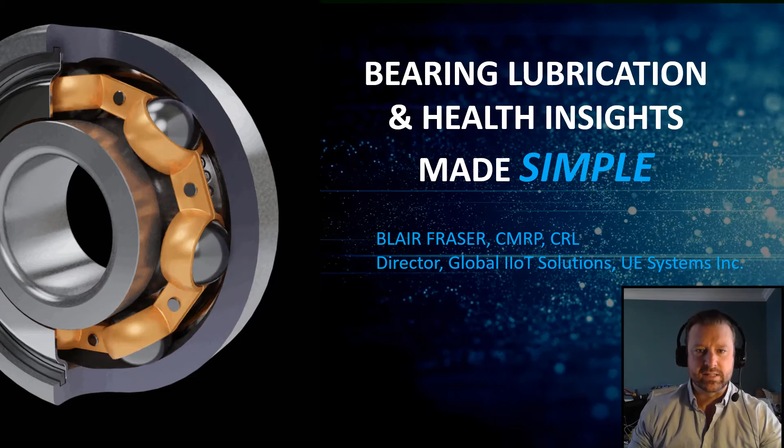Before we dive into the content, I'll give you a brief overview of myself. You'll be listening to me the next 30 or 40 minutes. My name is Blair Fraser. I am a CMRP and CRL. I've spent the last 20 years in maintenance and reliability, with about the last 12 years of that focused on the technology side. Before that, I was an end user, responsible for equipment in various industries. Over my career, I co-founded an artificial intelligence company called Cortic.ai. I'm a co-host of a podcast, hopefully you've heard of, called Maintenance Disrupted, and I'm also an adjunct professor at the University of Wisconsin, the Connected System Institute.

As I look out in the ecosystem of IoT, specifically from a bearing monitoring point of view, I used to be able to count on at least both of my hands the number of vibration sensor companies out there. Now, with the advent of MEMS sensors and easier to connect data, that number has risen to hundreds, if not thousands. Really, as we look at this, there seems to be a solution for every single problem we have out there. But really the question is, are we even focusing on the right problems to begin with?

When we think about IIoT, the Industrial Internet of Things, we think back, at least I might date myself here, to the early Star Trek days, when information was coming out to us. We have this idea of having a command center with all this information coming in. But the reality is, where we're at in our data journey, we have enough data, we're generating enough data. What we need more of is insights.

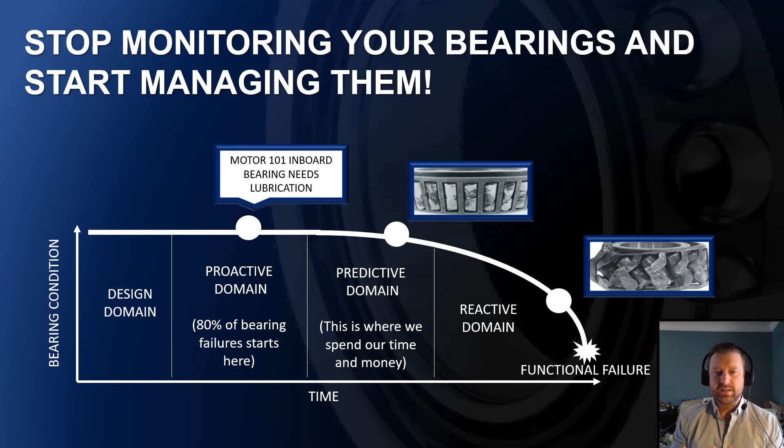Now, when it comes to identifying failures on that P to F curve, ultrasound owns the apex of that P to F curve for bearings. One of these is our P to F curve that we promote on our website, and the others is by other industry consultants and things like that. I don't think it goes into very long debate about ultrasound and its value proposition.

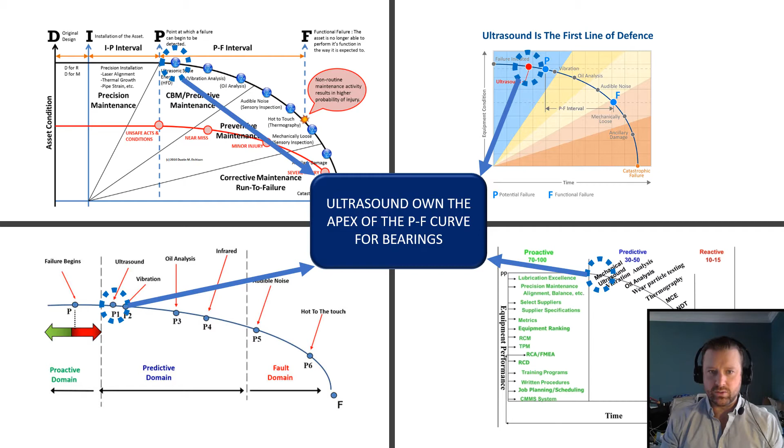Now, it's often seen as that first sign of an issue once a bearing starts to have those conditions. But this goes back to a study a long time ago, and if you think about it, what we're doing with ultrasound is we're listening, we're measuring for friction. So what many studies have shown, and these studies often get reproduced year over year in academia, is that ultrasound will be able to detect a change, or what they call an incipient or initial stage of bearing failure, before there's a change in vibration or temperature.

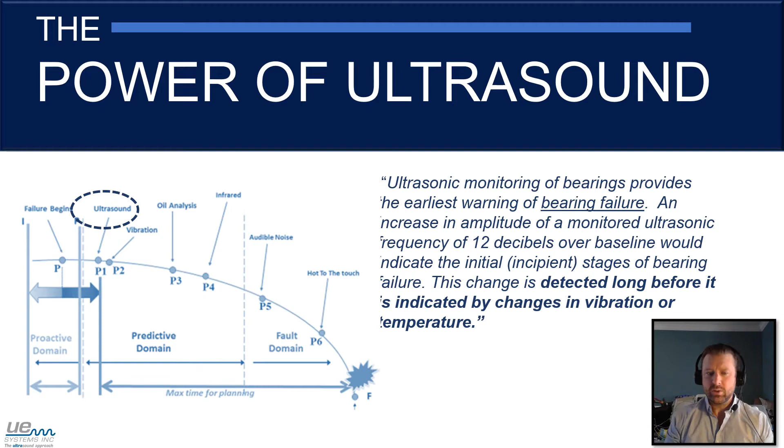So it does really give us that advanced warning notice, but in that signal it's doing, measuring that friction, we can also use it to really own that proactive domain. So when we look at ultrasound, what is it doing? I just read a study yesterday from Plant Services magazine that indicates ultrasound is actually growing faster than vibration in terms of a condition monitoring technology. More people in their study plan on implementing ultrasound than vibration, which I think obviously from a UE Systems perspective speaks to the power and simplicity of ultrasound.

So what we're doing when we're putting an ultrasound sensor on - now all ultrasound sensors are not created equal, and there is a difference between acoustics and a microphone and an ultrasound sensor. We're starting to see with the advent of IoT and specifically the low cost of MEMS sensors saying, oh, I have ultrasound in this, or I have acoustics in this. And you do, for a certain point, but do you have the sensitivity and the frequency range that we need to look at from this friction point of view?

So what we're doing is when we mount a sensor - I'll quickly hold it up. This is one of our ultrasound sensors, called our UltraTrak 750 sensor, that gets mounted to a bearing. And what it's simply doing is listening to that bearing, listening for the signs of friction and impacting.

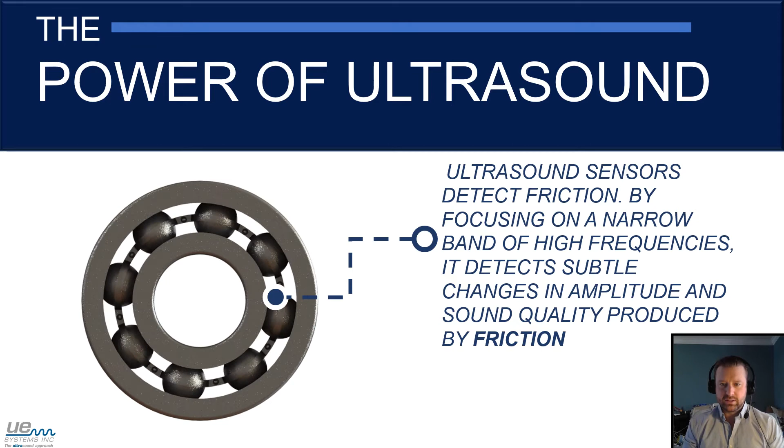And what's interesting is when we think about this, it goes back to Nolan and Heap again with that P to F curve - what they fundamentally taught us is that doing maintenance, or making decisions based on the condition of an asset, is a lot better than doing it on time. But yet for our bearings, and specifically lubrication, we're still doing it on time and not the condition. So without a doubt, the condition of that bearing is proportional, or directly proportional, to the friction in that bearing.

So the value of vibration - we are a big believer in vibration. We are UE Systems, we're a big believer of having a toolkit of available condition monitoring and strategies, and that is what is going to set the difference for you and your assets.

The reason I wanted to bring this up was, when you think about vibration, essentially what we're doing in the simplest terms is we're measuring displacement, we're measuring movement. So something has to move, even very subtly, before vibration is going to pick it up. So what we're doing with friction and ultrasound is we're picking up those subtle changes in impacting and friction versus movement. That's why we're able to pick up a lot of these failures before vibration.

Because we don't have to wait for this thing to physically start to move. Whereas with vibration, you would typically put a triax sensor in to measure all three axes, because you're trying to measure movement in different directions. Where ultrasound is very directional - if you think about this, if you were to listen to a bearing just with your ears, of course this is in the audible range of a human, you would fine tune it. You would say, okay, sound's coming from that way.

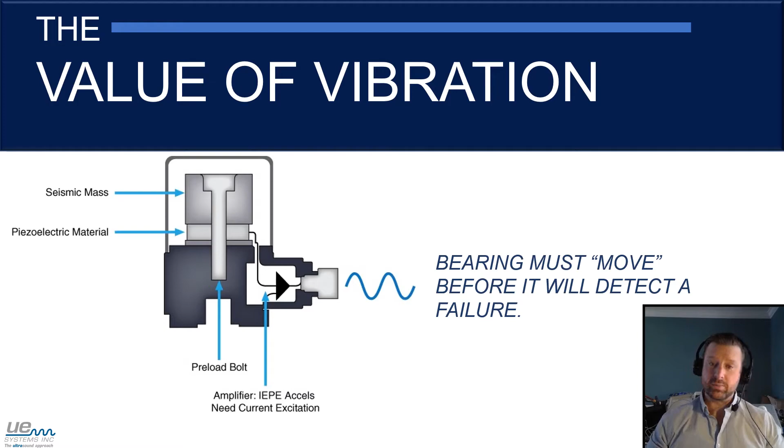And start to hone in from that point of view. So sound obviously comes out. What it allows us to do with ultrasound is mount in locations and areas where we're not concerned about different axes and things like that.

So let me give you this hypothetical question. Do you agree, even without identifying the exact cause of a fault, there is great value in simply identifying that maintenance is required, therefore avoiding catastrophic failure and the potential for secondary damage, injury to personnel, and excessive downtime? Is there value in knowing that something's wrong, even if you don't know the exact fault? The reason I'm saying this is because I firmly believe that, from a vibration point of view, is identifying the root cause or the fault.

Is it an inner race defect? Is it an outer race defect? With technologies like modal and ODS and those type of things, you can get down into the weeds. But my question to you is, does your action based on that data change whether it's an inner race defect or an outer race defect? Most of the customers we talk to say no. We will use that data in a root cause analysis to try to engineer out or eliminate the defects that are causing this, which I think is fantastic. But in terms of the direct action you're going to take, it's no—I'm going to replace that bearing.

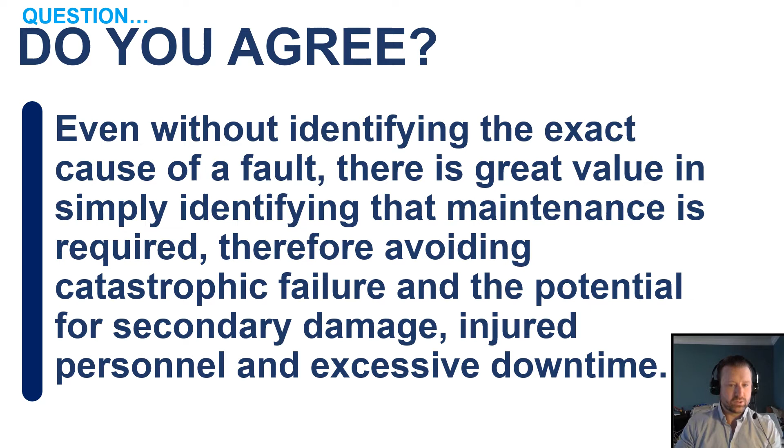What we found is, as we see the advent of IoT start to really push us away from route-based data collection—typically people walk around with a handheld analyzer and take route-based data on a monthly basis—our studies and industry studies show that on average, 80 to 90% of the data we're collecting is on equipment, on machines, on bearings that have no impending issue. They're healthy, there's no action required. From a reliability, asset utilization, uptime point of view, that's fantastic for you. But from a business perspective, you're spending a lot of time and resources going around to pieces of equipment that don't need their data collected.

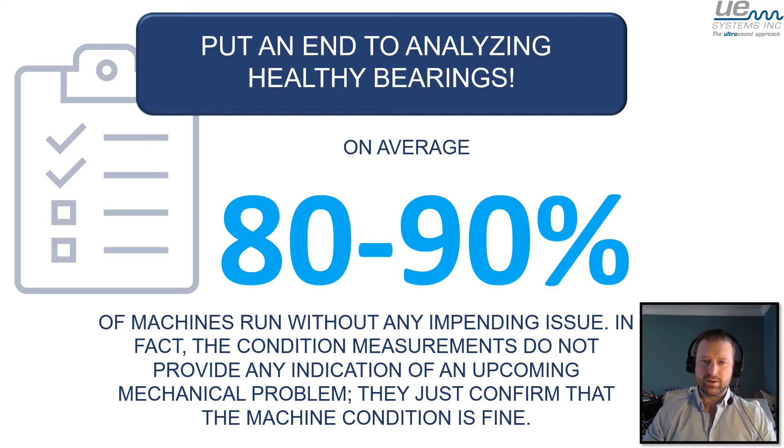Now, there's always an advantage of having a human out there. As much as I am a fan of technology, and I do believe technology has its place, we're not at the point now where we're ever going to replace a human putting physical senses out to things. There's certain things people may be able to pick up by doing routes—is it leaking, is it dirty, things like that. But on average, 80 to 90% of the time, we're collecting data on machines that are healthy. That's really where the IoT part is coming in and simplifying how we're managing our bearings.

I'll get into this a little bit later, but study after study shows—this is a study by SKF, but it's been reproduced by industry analysis and other bearing manufacturers—that the smoking gun of premature bearing failure is lubrication related issues. There's no doubt about it. This study showed over 80%. I've read other studies that show 60%, 70%. Regardless, whether that number is 80% or 60%, it's still the obvious cause that we can start to address in that proactive domain.

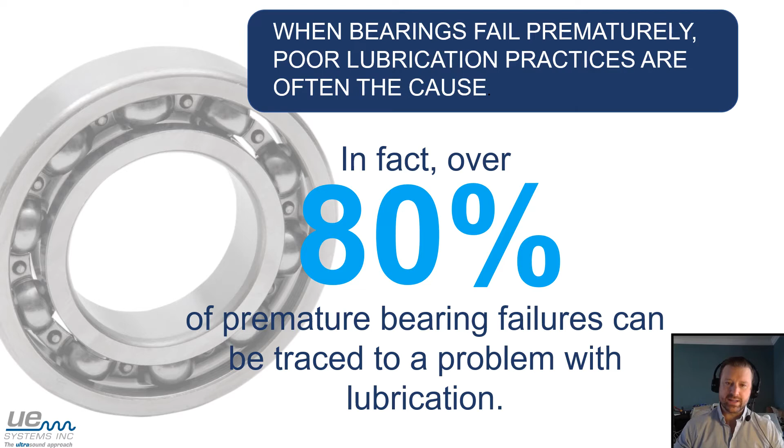So I'm going to challenge the mindset of thinking here a little bit. I want you to imagine that you could walk up to any bearing in your facility and ask it just one question—just one question. You can't ask for more questions. But imagine you could walk up to a bearing and ask it just one question. What would you ask it? I'm going to let that sit and percolate for a minute.

So I get typical answers: when are you going to fail? Or what are you going to do for me today? Or even, how are you feeling? Those are some good questions to ask. But let me flip it on its head, because what you probably just answered in your head or in the chat is likely, and no offense to anybody—this is just human nature—a very selfish question. We put those bearings in place, we want them to spin with as little friction as possible to do what it needs to do. But if we flip that question on its head, imagine that bearing could ask you a question. What do you think it would ask you?

Isn't that interesting? We're flipping that whole scenario. What it's going to ask you is a better question than what we would ask it. It's probably going to ask, hey, when are you going to grease me? I need some grease soon. Or, you're starting to operate me outside of my design parameters. We got to flip the question on its head. That bearing is talking to us, trying to ask us questions or tell us information. We just need to be able to listen to it.

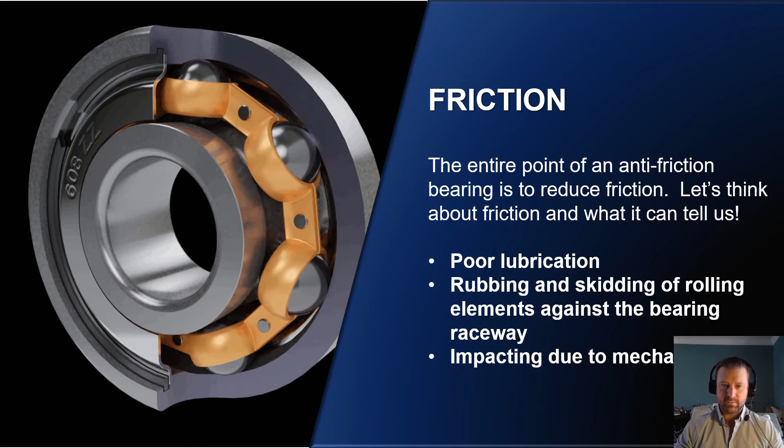By measuring just one variable, the friction in that bearing, we can get some very simple but very useful insights. So let's go back to that study where they said over 80% of premature failures can be traced back to a problem with lubrication. If anyone wants to reach out to me, I'm happy to send you this study, it's in the public domain. What it talks about is they break that 80% down into 4 categories.

Insufficient lubricant quantity - often when we think about that 80% of premature bearing failure, we ask, are we lubricating enough? Are we giving it enough? But that is actually the smallest part of that 80%. We start getting into a long time without renewing, unsuitable lubrication, so mixing greases, putting the wrong grease type or oil type, things like that, and contamination, lubricant contamination. We know what dirt, grime, and water does to our lubricant - it essentially breaks it down.

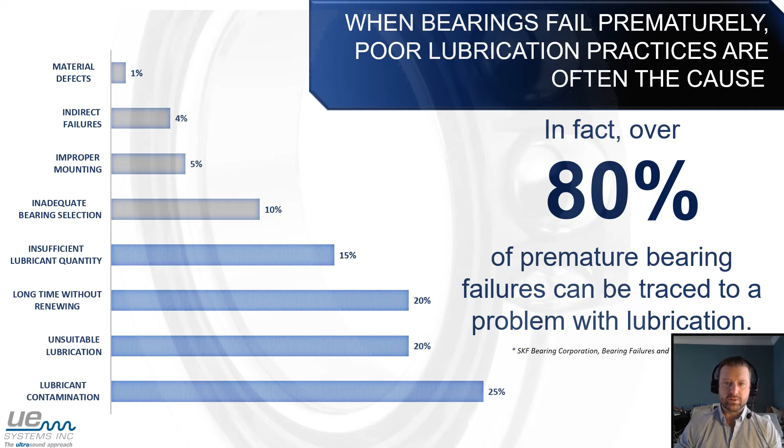So we need to look, when we're starting to look at that proactive domain, at all 4 of these categories that are causing that premature bearing failure, to truly make it simple and easy to monitor the health of our bearings. Now, what's happened with lubrication as we focus on that proactive domain is, we've gone to great lengths to make sure from a mathematical or theoretical point that we start to lubricate as accurately as possible.

Now, this happens to be a Noria calculation. There's one by SKF, and I think they're fantastic calculations to get you into the ballpark. The challenge is a lot of our factory floors, a lot of our machines are being asked to do things differently on a day-to-day basis. I'll give you an example here.

If you look at this calculation, there's a parameter called N equals speed. How many of us have assets that rotate at different speeds? More and more we're seeing single speed motors getting transformed or retrofitted into variable speed drives. We're seeing control valves go away and variable speed drives come in. So speed has a huge impact, and that obviously makes sense - the faster it spins, the more rotations, the more lube it's going to need eventually. And also, all these correction factors.

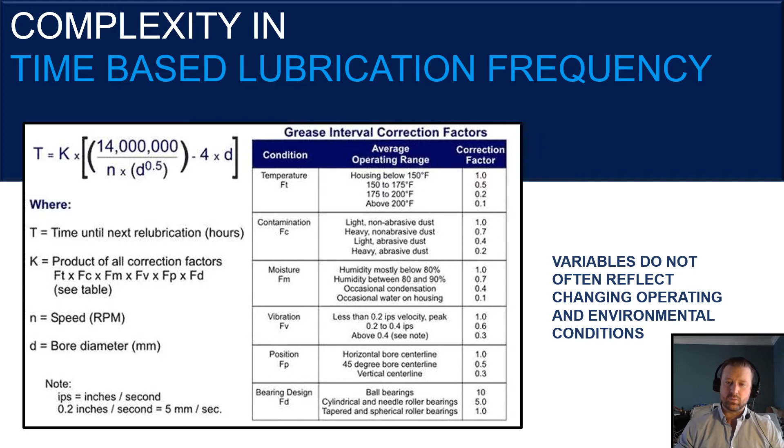Give me an example - here's temperature. The first category is housing below 150, and the next one is 150 to 175. What if that bearing housing is 151? Do I use a correction factor of 1 or 0.5? In fact, I should probably use like 0.93 or something like that. The whole point I'm trying to make is that our variables used to make these calculations often don't reflect what's actually happening in our operational environment.

So what we do, and this is the main driver of the simplicity of our systems like the OnTrack, is using ultrasound to monitor that very telling condition of friction in our bearing. The reason I reference this is often people look at this and say, this is too good to be true, it can't be that simple. We say it's so sophisticated, it's simple. What's happening in these sensors and how it's measuring that ultrasound, trust me, it is not simple. But how the information gets to you is very simple.

So what we do - this is an ISO standard, ISO 29821 - talks about once you set a baseline. Everything is dependent on that baseline, and I can go into a lot of information on how you set a baseline, particularly how do you set a baseline on a bearing that's already been lubricated, already operating. Not too often do we get a brand new, healthy, well-lubricated bearing come into our facility.

So what we see is we see an 8 decibel increase in that friction. To us, the decibel reading is a friction reading. So if we see an 8 decibel increase over baseline, it's an indication it requires lubrication.

What we're doing here, and it's important to note, is that at 8 decibels it's not screaming, there's not going to be any difference in temperature or vibration and movement. It's that thin layer of film on the rolling elements starting to degrade. So it doesn't mean that at 8 decibels you have to rush out that minute and lubricate that bearing.

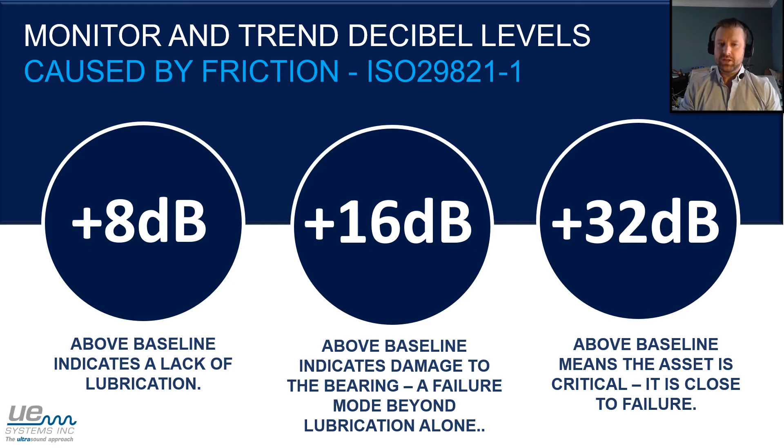Now we see a 32 decibel increase over that baseline, it's a critical failure. So this is when you start to need to plan to have some immediate action in the near future.

So this is the easiest way I can start to describe, and really the title of this is to simplify. How do we make bearing lubrication and health insights simple? This is one of the ways we do it in our UE Insights with our on-track product. Let me walk you through this.

So imagine you have hundreds, if not thousands, of bearings in your facility, and you want to know the condition of them all. What you don't want to do is look at squiggly lines where you have to stand on your left foot, bite your tongue to the right, and go like this, and then think, I think I see this.

This is very intuitive to use. In fact, what we designed this for is even people that don't necessarily have a technical background. You don't have to be an ultrasound expert, you don't have to be a bearing expert. It's very easy to see this.

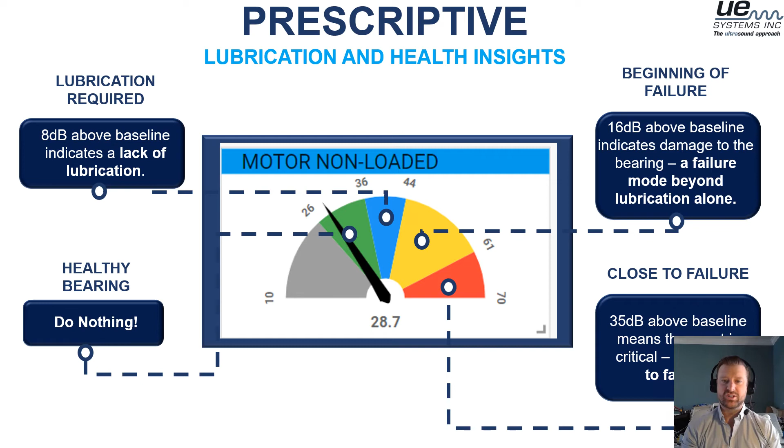And again, I said this before, I don't care what the failure mode is, most every failure mode in a bearing leads back to friction. So if that friction is starting to increase and climb on a daily basis, you know the trajectory of how quickly that bearing is starting to fail. So how simple is it to see bearing health insights from friction?

This is actually the trend that I took a few days ago from this bearing. And what you're seeing here is, first of all, there are four dashed lines. Now, the green one at the bottom is hard to see. That's actually the baseline friction, which is sitting at, I believe, 9 or 10 decibels. And you can see the solid blue line floating above it. That's the real-time friction taken every minute from that bearing for 24 hours. This is a healthy friction trend in that bearing.

That blue dash line above it, which is 8 decibels above that, is the lubrication friction level, the need for lubrication. If that blue trend line was to go above that blue dash line, we need to start lubricating that bearing. Now that yellow is the warning and the red is the critical. This is really how simple it is to monitor the health of your bearings. We're trending a friction time series value. This is ideally what we'd see.

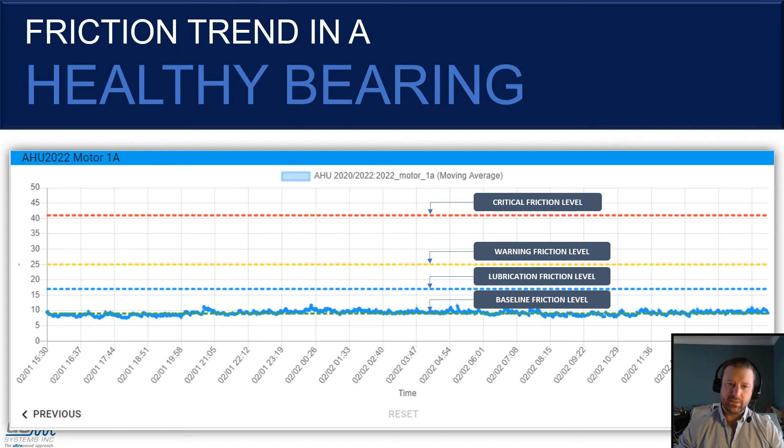Now, the reality is, a lot of our bearings, we don't see this right away. So when we take a closer analysis, you'll find that friction is trending near that baseline, so it's not waving around.

Now, this is probably one of the most common questions we get asked: I have a variable speed drive. Won't my friction change?

Okay, so a lot of research has been done for this. I welcome you to read the study, we have some studies here I can send you where friction, or ultrasound, was trended through varying speed drives. And what we find, and this is fantastic about friction, regardless of the speed, friction should remain constant. There's a caveat there: in a healthy, well lubricated bearing, regardless of speed, the friction should remain constant.

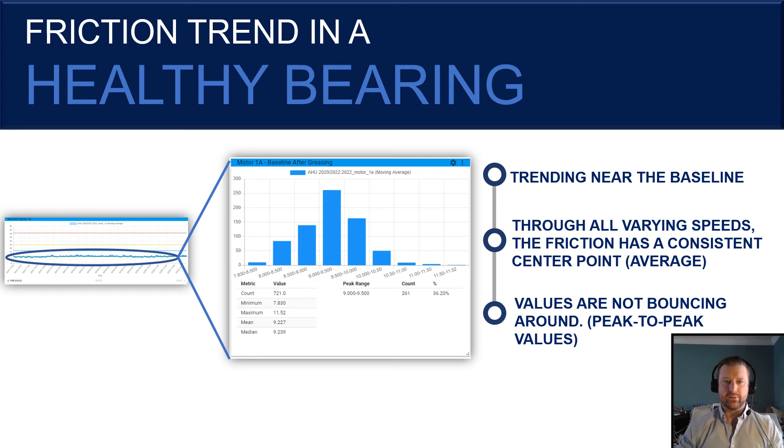Now we do see maybe a 2 or 3 decibel change, which may make us have to change our alarm limits a little bit from the lowest speed possible to the highest speed. Even on a well lubricated bearing, we might see a slight increase in that friction. Now, as we're talking about a healthy bearing, when we do not have a healthy bearing, that completely changes. We see a huge, obvious impact on that friction. And what we see too is we don't see the peak to peak values change much. So we can have an average value hovering around that baseline, but we don't see a lot of jumping up and down, which I'll show you exactly what that looks like.

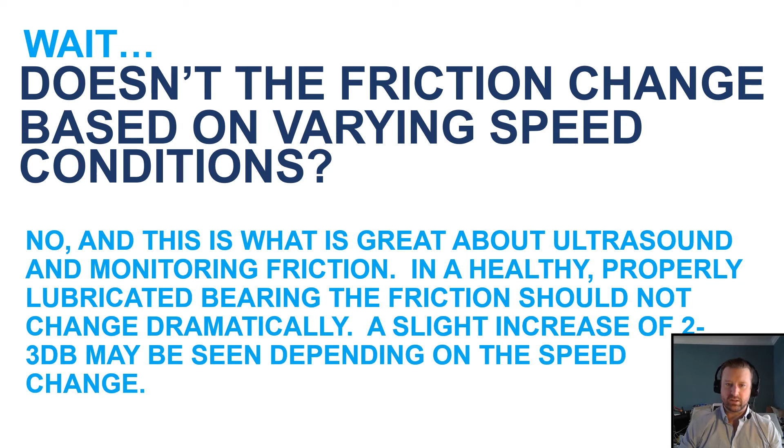So wait, doesn't friction change based on varying speed conditions? As I talked about, no. I'm going to show you what this looks like with some trends here. We do see a slight increase. Now, if it's an unhealthy bearing, we see a big increase, but that change in decibels should not change too much throughout varying speeds. Remember that.

So what does the trend look like in an under lubricated bearing? This was a case study. We put this sensor on for about an hour to gather some data. Within an hour, I can start to see relative condition and needs of those bearings. Our initial friction was at 14 decibels. We had a peak to peak, so the max reading and the lowest reading within that time window, close to 7 decibels, which is a bit high. That's a little bit concerning to me.

And what that tells me, if I was to zoom into this, and I do have one I'll zoom in here, is if you were to look at the actual trend, you can see it bouncing around. Now imagine you're playing an audio off that bouncing, you would literally hear static. And what that's an indication to us is, that bearing requires lubrication.

Now what we were able to do is, this is actually our SmartLube system, which uses these. You might have seen these or used them in your facility. They're referred to as automatic or single point lubricators. What we've done is we designed our own called the M-UE lubricator, which is designed specifically to work with our SmartLube system.

So in this use case, we were able to monitor the friction, and through my cell phone, in fact I used my computer, I was able to apply and tell this thing remotely from hundreds of miles away to actually put a little bit of grease into that bearing. So I put 15 cc's of grease into that bearing. What was actually happening was I had to fill some remote lubrication lines and things like that, but I did it from the comfort of my home.

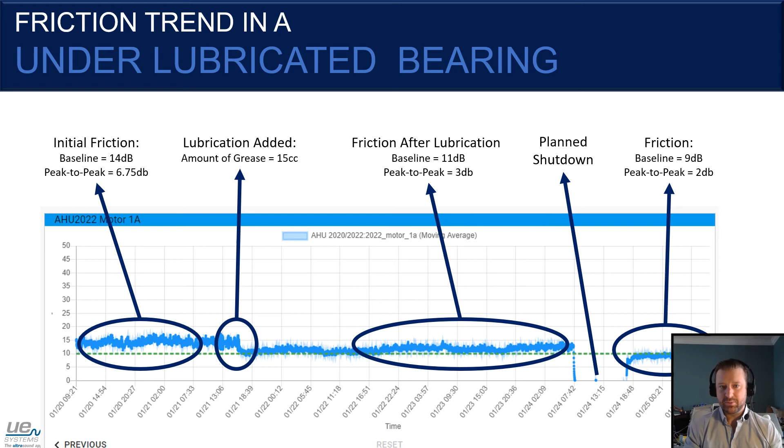And I should have noted at the start of this, this is on an HVAC unit, a varying speed drive. During this time period of 24 hours, this went through every speed possible of that HVAC, and you'll notice there is not a large change in the friction or decibel readings. This is how simple really it is to lubricate and to monitor the health of your bearings.

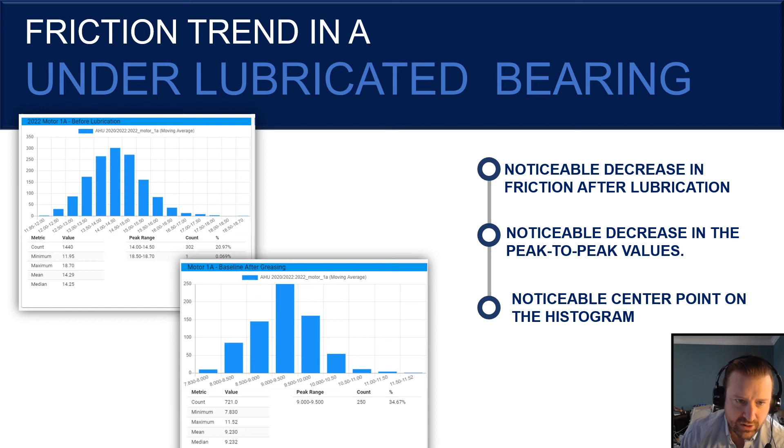When we look at an under-lubricated bearing, the histogram on the back end shows a nice bell curve. There's one center point, and regardless of speed, we want a nice center point. Not only did we see a decrease in friction, but also a decrease in peak-to-peak value. Our center point went from 14 down to 9 decibels. Our minimum was 7.8 and maximum 11.5, where on the other side, our minimum was 11.95 and maximum 18.7. Quite a big difference in those peak-to-peak values.

So the friction trend in an under-lubricated bearing shows a decrease in friction the moment grease hits that bearing. One of the challenges we set out to disrupt is bearing lubrication, being able to lubricate very precisely using single point lubricators such as the MUE lubricator. But we need confidence that grease is actually hitting the bearing. A lot of the challenge with these single point lubricators is they're based on time, which doesn't impact the condition of the bearing. If the grease cartridge runs empty or the battery dies, there are many reasons why grease cannot or doesn't reach the bearing.

We know grease is hitting the bearing because, whether good or bad, we see a change in friction. In this case, we added 4 cc's, and you can see that change in friction after adding it. We added another 3 cc's, and we kept seeing that friction level drop. We also saw those peak-to-peak values start to drop. So it becomes very obvious once you install a friction sensor onto a bearing.

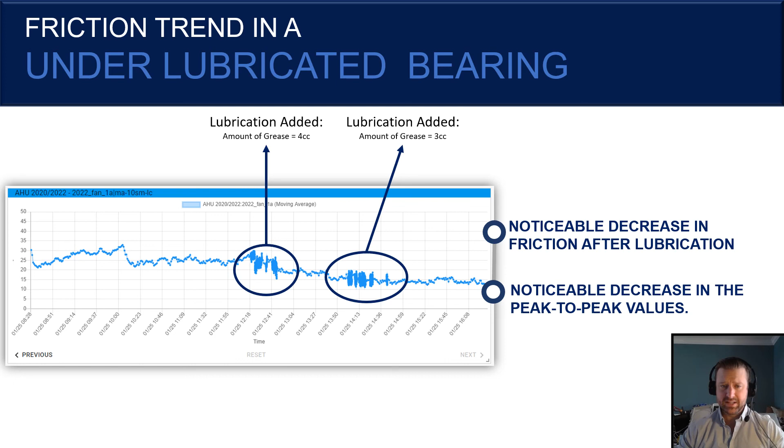Generally, what is its health, and is it asking for something? Remember that question, if that bearing could ask you something? It is asking you, it's just speaking the language of lubrication.

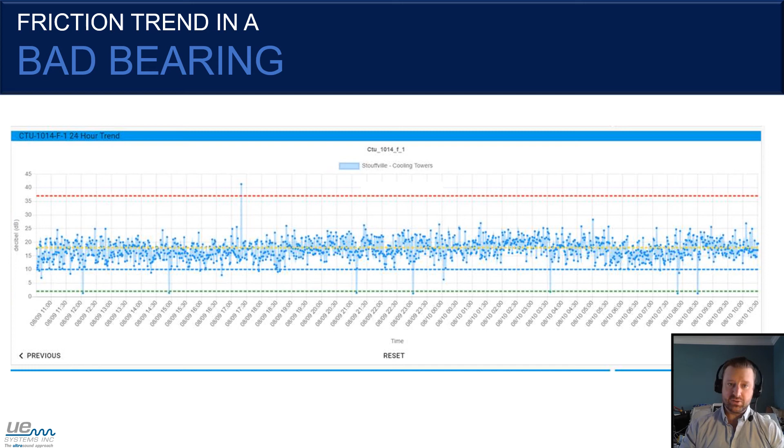Now the friction isn't increasing, but the peak-to-peak values are, which is an indication it needs lubrication. If we do not lubricate it, we'll see that friction start to rise over time. If we look at the histograms, we'll notice friction increased day after day after day. I think it was 4 times in 4 days how much that friction increased. We started at a peak range or mean of 4, and ended up with almost 14 decibels - a huge increase in friction. This is a bad bearing. Becomes very, very obvious. I don't know if it's an inner race defect or an outer race defect, but I do know it is a bad bearing.

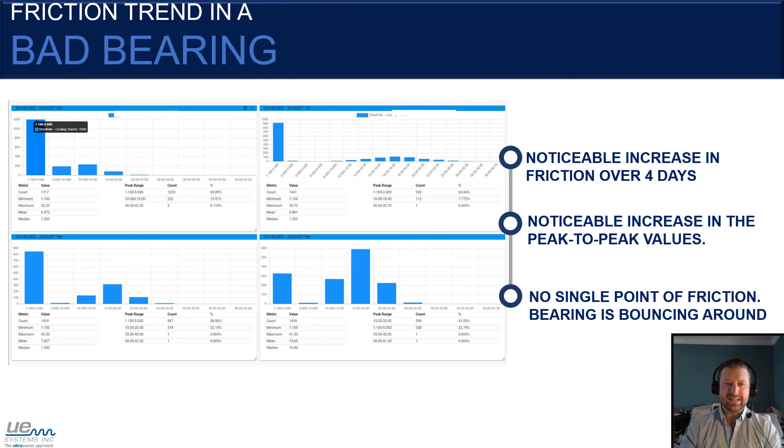So as I mentioned, everything is really about setting that baseline. A lot of thought has to go into setting that baseline. We recommend 3 different ways of setting the baseline: setting while lubricating, historical, and comparison.

So with the addition of the SmartLub and being able to do this remotely, this really changes the game. When you install a new system, you have these lubricators. You can grease at any point in time, or it'll automatically go and grease for you by measuring friction and

restoring that friction. So we would always recommend setting while lubricating. What you would do is you would put a small amount of grease. These UE lubricators can output varying sizes or varying amounts of grease coming out of it, as low as 0.33, so a third of a cc.

That is like half a teaspoon. It's a rounding error on typical grease guns, right? So when we say apply a small amount, we literally mean apply a small amount. You apply a small amount, and 3 things are going to happen.

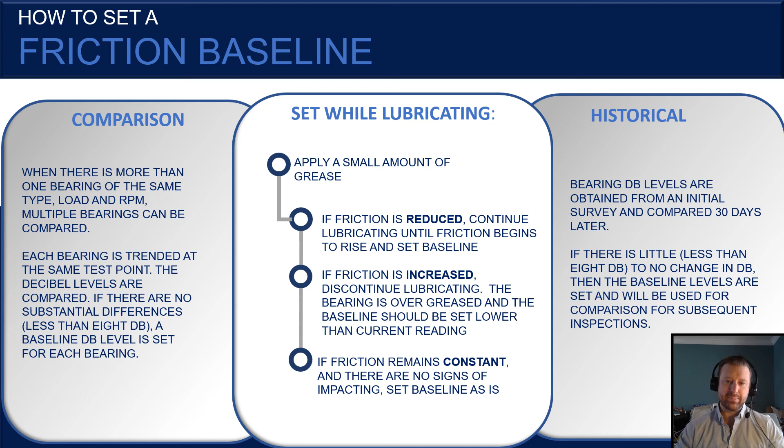So bearing lubrication and health monitoring made easy with friction. So the moment you install an ultrasound sensor, measuring that friction, measuring that impact, look for a consistent average trend value. Look for a nice steady line across all operating conditions.

Look out for those peaks and valleys, that noise that we see. While the friction might be there, this is a good indication that it's bouncing around, that it's starting to impact. And that can tell us a lot.

And look for a lack of increase over those 30 days. If the friction's starting to increase over 30 days, there's something going on with that bearing. It shouldn't be, if we think about how our bearing fails. The closer we get to that functional failure, that F over time, the higher the friction is going to be. It's like a battery dying. A battery dies like this and then just drops off. So that's what we're looking for.

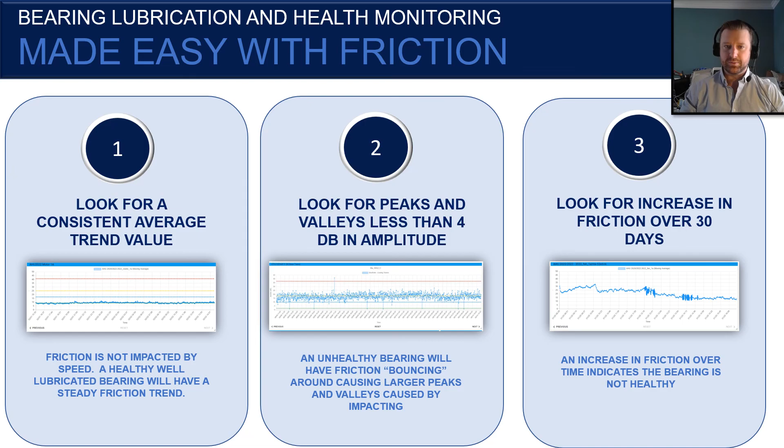It is really that simple to do. So I do appreciate you taking the time going through really how I believe that monitoring the friction is a growing condition to start to monitor your bearing and lubrication insights.